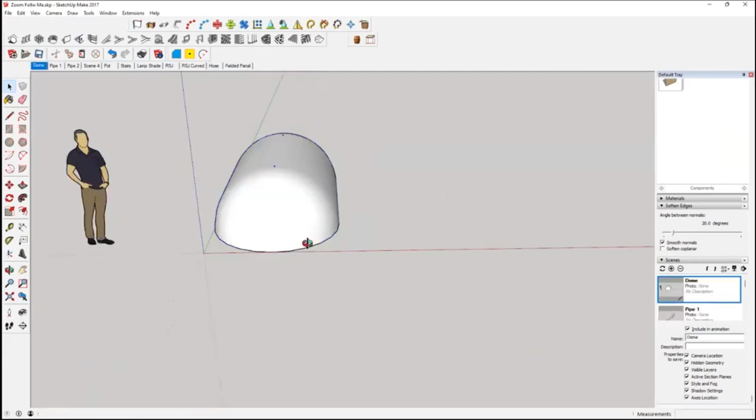Follow me tool. To do a dome like that, you would start off with your square tool and draw a square. Let's just go for 2, 4, enter, which will give me a 2 by 4 meter square.

And you click on the front. It normally comes up dark blue. Right click it and reverse the face.

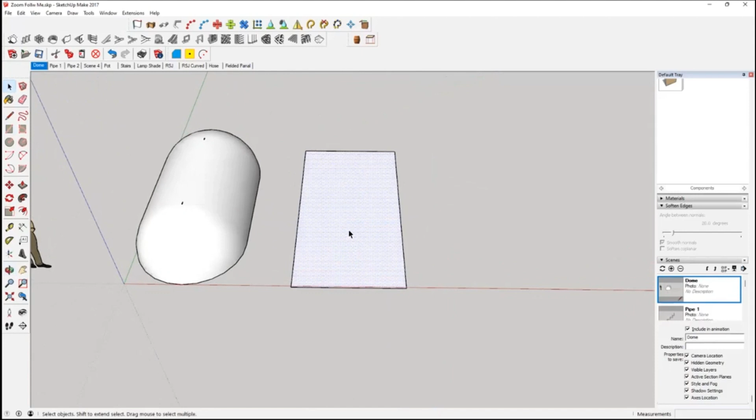It's always good practice to reverse onto the white face, because that is the face fronting the front face. So now we want to get a curve on the end. So we'll put a couple of guidelines in. Also, we'll come down.

If you come down, I don't know if you can see that, we're on the green axis, so it is going along. But you will find that sometimes you can do it and you start going on the blue axis, and it looks like you're coming along the right way.

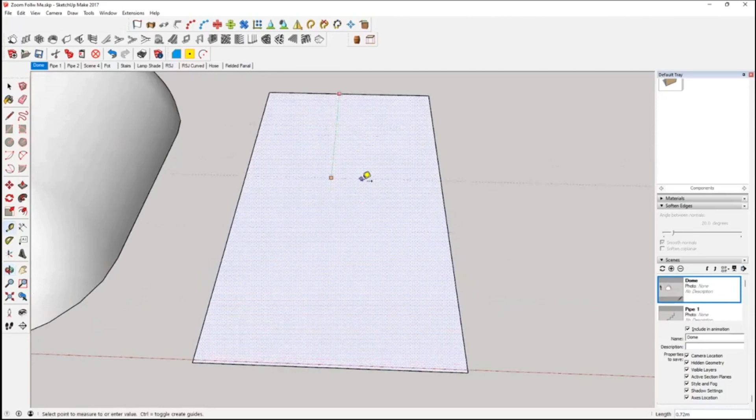So always constrain to the axis you want to draw the line on. So that's a flat, it'll be on the green axis, which is your left arrow on your keyboard. So now, no matter where I put that guideline, it's going to draw down that green line. So I'll come down, and if you look in the bottom right hand corner there, it's got length.

Just press 1, because I'm working in meters, and that line should be at 1 meter from the top. And we'll do the same from the bottom, on the edge. So it went there to the blue.

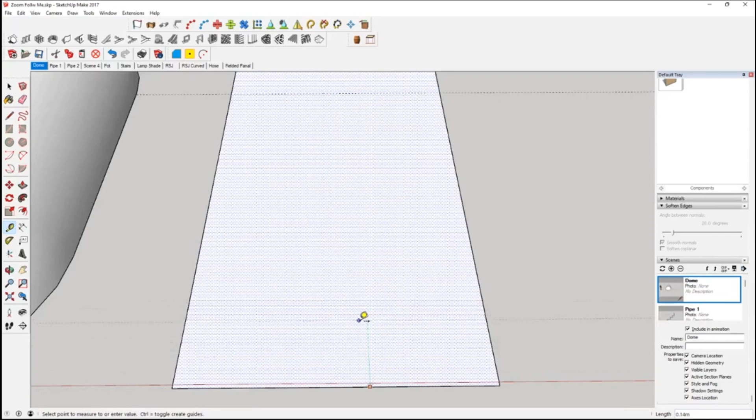And it looks like you're drawing along the line, but you're not, you're drawing up in the sky. So always make sure you go along the right axis. Along the green, we'll press 1, and there.

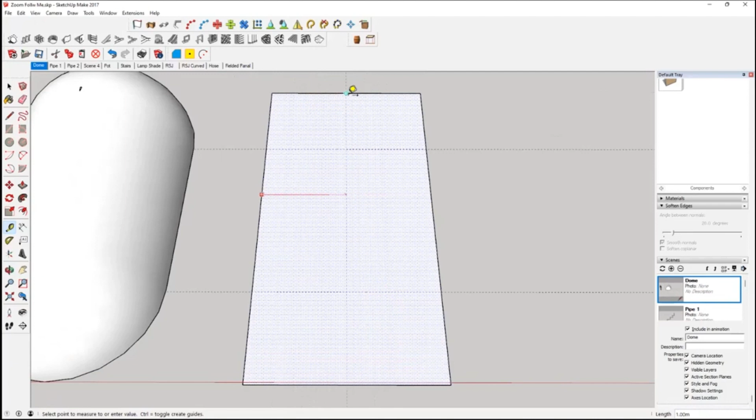And then what we want to do is find the center. Now, SketchUp does inferencing, so if I go along this top edge, it'll come to there, and it's 1 meter in, and it's a center point. When it changes to the blue, see there? That's the center point.

And it will do the same if you come down the side. Come down the side, there we go, there's center point there.

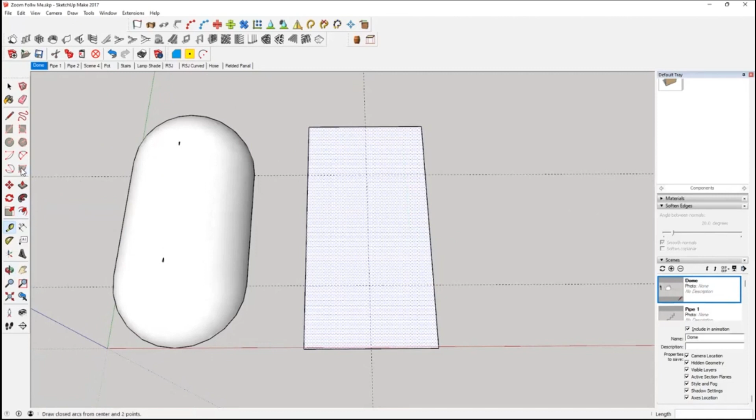Always worth knowing. Now to round the ends off, we'll use the pie tool. And if we put it on the center, you can change the pie tool as well, it can do it on the green axis.

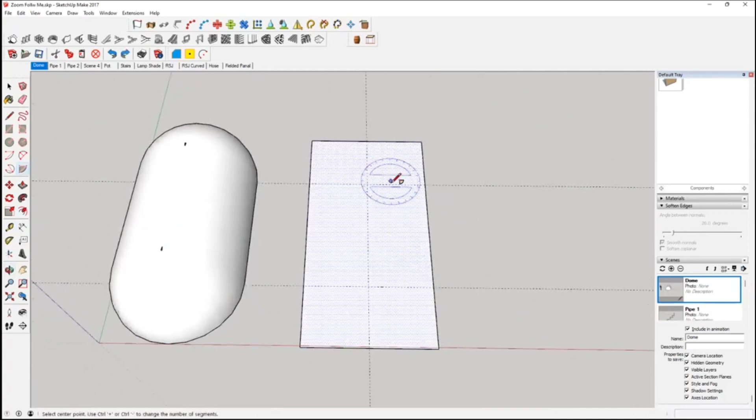It will go up that way, but that's not the way we want to go. Blue axis will go flat, and obviously red axis will come the other way.

So if you use your arrow keys, your up arrow is your blue axis, your left arrow is your green axis, and your right arrow is your red axis. Well worth knowing.

And same again on the bottom.

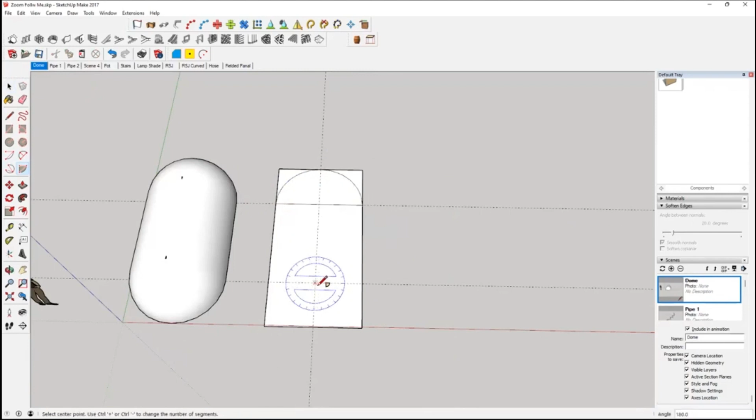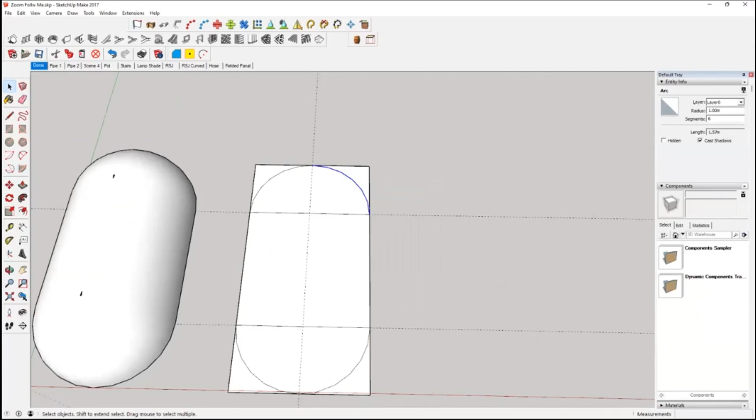Now what you can do is change these curves. If you look on the right, or right click, entity info. So if you want a really smooth curve, change that segment to 40, 20, whatever you want. But bear in mind, the more segments, the more power hungry it's going to be.

So anyway, we'll take that corner out. Take the corner out with the eraser. And there we go, we got the outline of this eventually.

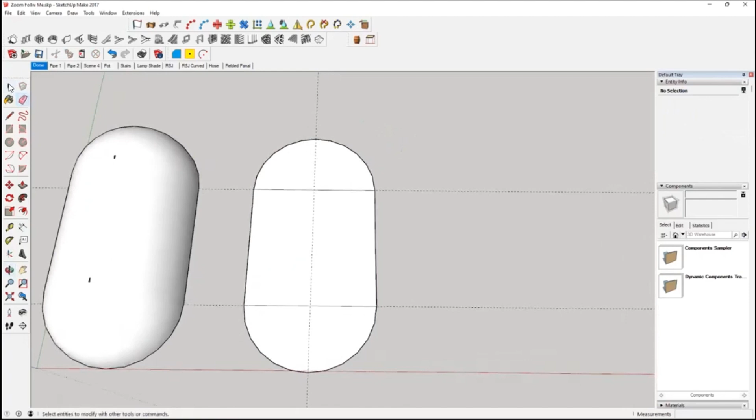So then what we need to do is draw the profile of the curve. So we can use, again, we can use the pie tool, come on to the center. And this time we want to change the axis to the green axis. We'll come along and we'll go up, and you can constrain it to what angle you want.

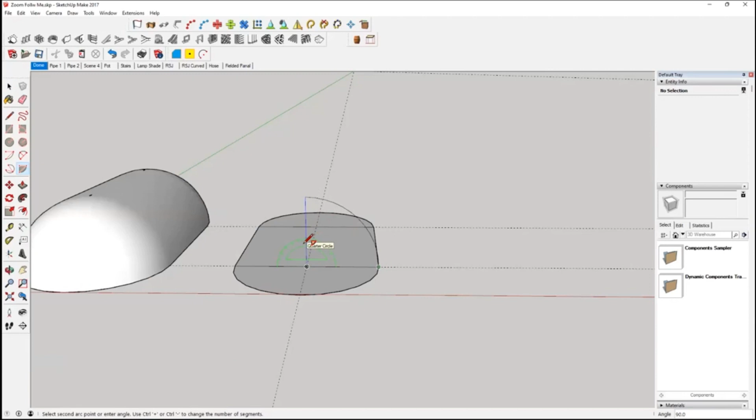So we'll go to the top, and if you look at the bottom right, that's 90 degrees. Click there, and then we've drawn our segment.

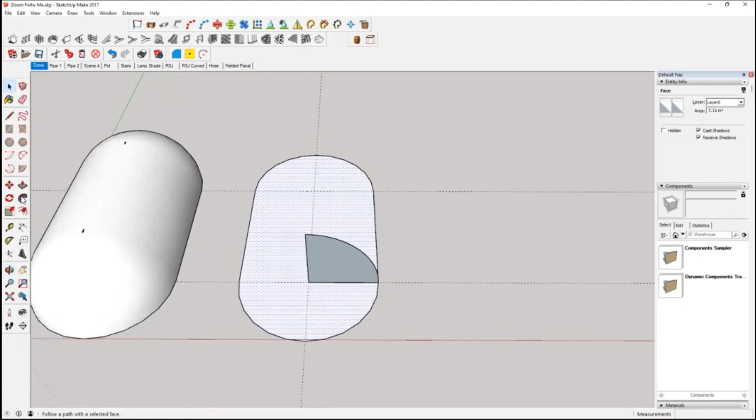So then the follow me tool - so now what we want to do is pick, we'll get rid of these axis lines, so the center is highlighted. Follow me tool, which is the double curve one there, and press on that, and there we go.

It's followed me round and made whatever it is. Now you do get excess geometry, this here is where the line went up when it followed it around.

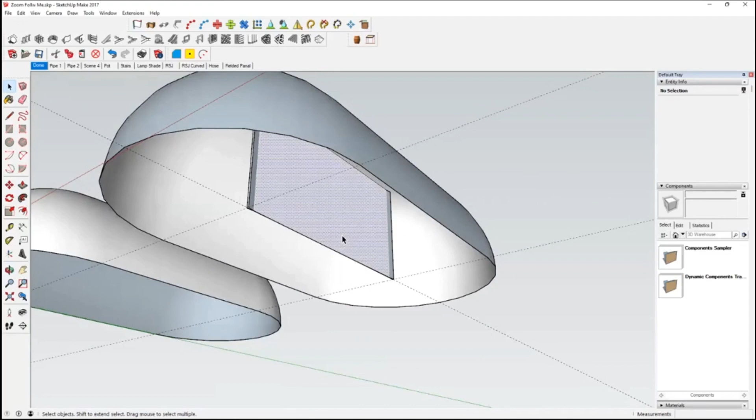So you can get rid of this, use the eraser. And that's gone. You can't get rid of this top line, well, you can get rid of one - see, it's actually part of the geometry there.

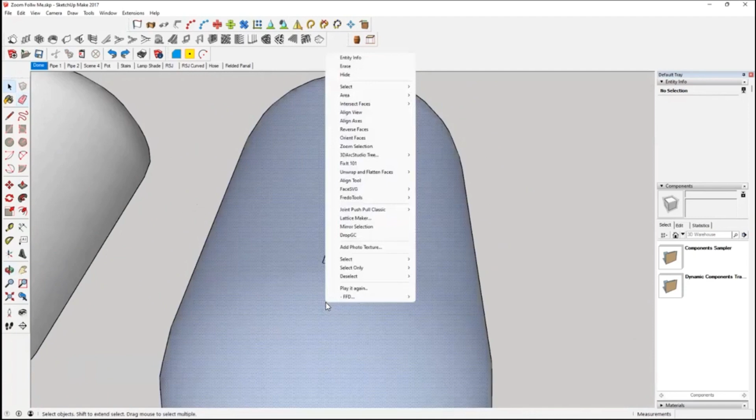So if you right click, reverse the face, there you go. And then if you want that solid, you draw a line across, it will fill it in for you. Pick that line and delete, and that is the basics of the Follow Me tool.